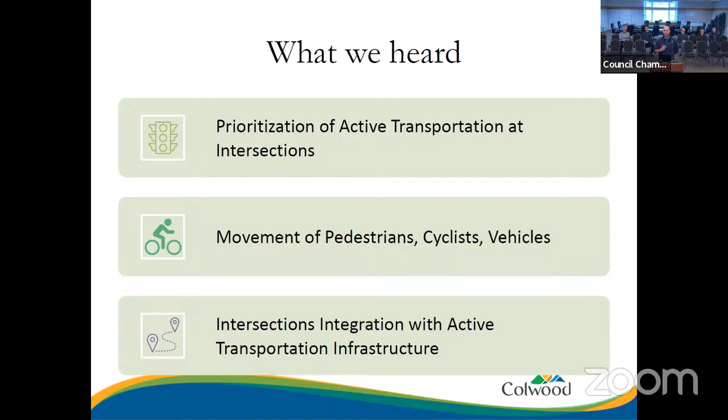Just to refresh on what we went over in the last meeting and what staff heard: we discussed the prioritization of active transportation treatments at intersections and the desire to review intersection design and explore different treatment options. What this means is reviewing how pedestrians, cyclists, and vehicles move through intersections to promote the use of active transportation, which means ensuring the integration of intersections with our active transportation infrastructure.

So these are the general guidelines for active transportation projects. Taking a step back, what guides our decision making for infrastructure: we have our OCP, which provides the community's input on the objectives and direction for the city. We have our TMP and ATNP, which outline the transportation network and design of the road network down to the facility types based on volumes, speed, and road classification. And we have the BC Active Transportation Design Guide, where you'll find the majority of guidance on our active transportation infrastructure and facility types, which came out in 2019.

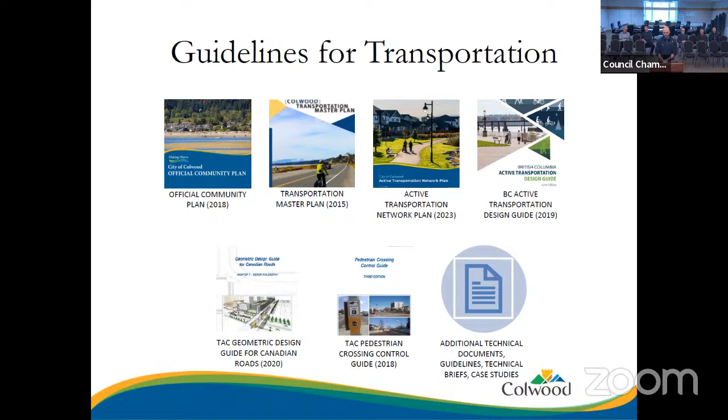Going down to the engineering standards, we have our Transportation Association of Canada geometric design guides for Canadian roads, and our pedestrian and crossing control guides. These provide the engineering requirements based on speed, volumes, and other design criteria. And of course, not to mention other technical documents, things like NACTO design guidelines, and other briefs and case studies.

I'll move on to the next slide here. Moving on to the active transportation treatments, here you can see the general change in active transportation treatments. Starting with the first one, a crosswalk with twin parallel line markings - this is the first level of upgrades you see at an uncontrolled crossing. Twin parallel lines provide that space for pedestrians to cross the road and provide delineation. Moving up, in areas with higher pedestrian volumes, or school zones or playground zones, you'll see things like zebra lines with advanced yield-to-pedestrian markings.

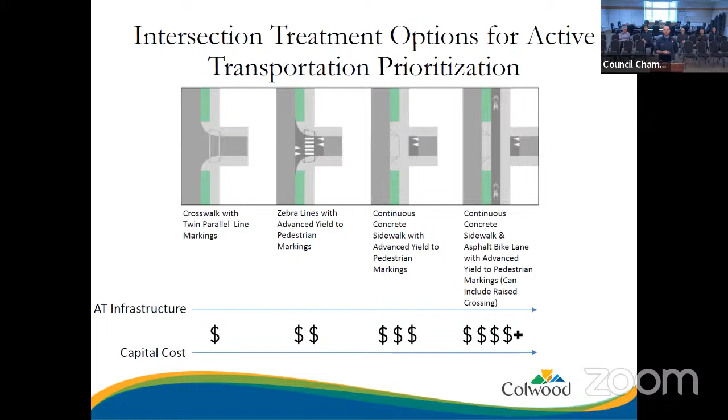We then get further into higher levels of active transportation treatments at intersections, such as continuous concrete sidewalks and continuous bike lanes. As you can see, an increase in active transportation infrastructure comes with an increase in capital cost, ranging from say $5,000 for thermoplastic all the way up to $50,000 for a crossing, as you get further into the active transportation infrastructure.

So as I already discussed, that first level is the twin parallel lines and zebra crosswalks, and then advanced yield to pedestrians, which is of course accompanied by yield-to-pedestrians signage.

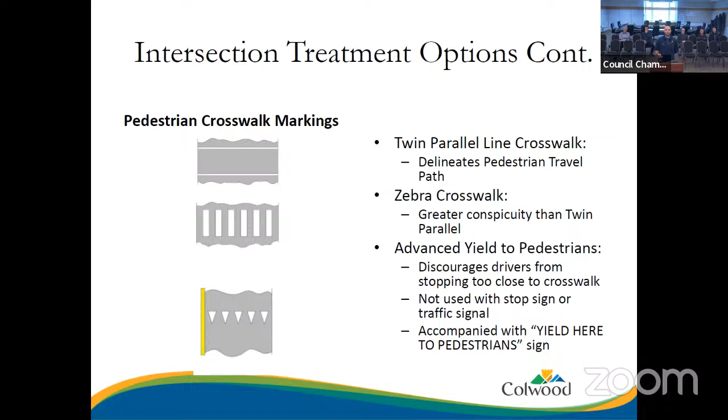This is a real life picture of what you can see for these types of crossings. So as you can see, there's the actual bike lane, which runs through the crossing, tactile warning strips for people with sight loss, providing intersection awareness here. Side street ramps up to the crossing and sidewalk. So this one in particular is a raised crossing.

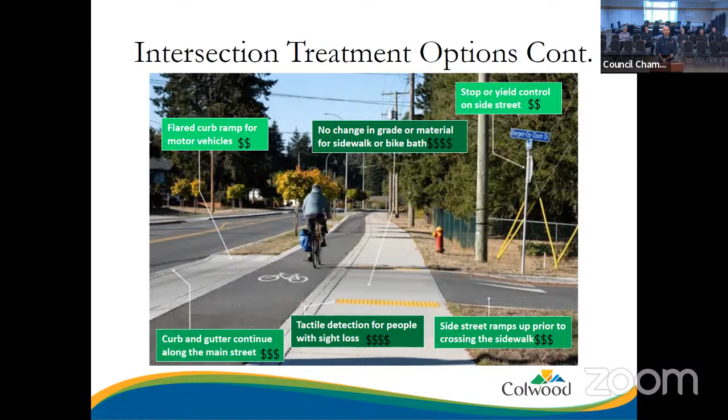And yield control. The different colors of green just show the difference in costs as you get further into the improvements.

So this is another type of treatment from our active transportation network plan, focusing on active transportation at intersections. This is where you can see in areas of high pedestrian usage, high vehicle volume, high speeds, and arterial roads. There's definitely a lot of treatments you can incorporate into active transportation design.

So you have things like number one, the no stopping, no standing zone. That's to allow for visibility of pedestrians and cyclists. Motor vehicle parking and stopping can't happen in front of this zone.

Bike yield line, that's again that warning, they call it dragon's teeth. That's used as a buffer between the crosswalk and cyclists stopping there.

Pedestrian islands allow pedestrians to get across the bike lane safely and have a place of refuge to wait, and also have a clear line of sight to the vehicles that are also waiting.

Bike queue area, similar concept, providing that visibility and a refuge area for cyclists trying to make that movement.

Number 5 is the bikeway setback, and that's just from the roadway. Number 6 is the corner island. 7 is the motorist waiting zone, for someone trying to make that right-hand turn. They're allowed to get over and have an area in case there's a pedestrian crossing or cyclist.

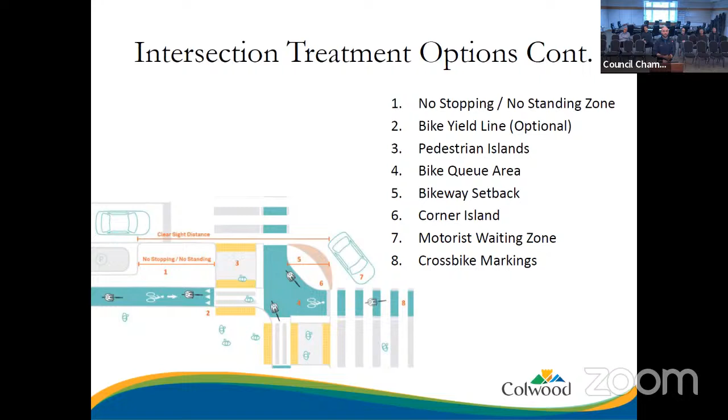And the cross bike markings, often delineated by different colors, such as green thermoplastic paint, and that's often a solid line rather than just a zebra.

So that was the first part, talking about the types of treatments and active transportation infrastructure at intersections and the different levels. Now we're here to talk about the sidewalk and bike lane projects. I mentioned those are starting hopefully next month, pending no speed bumps. We're going to go into the specific intersections and each crossing as part of these sidewalk improvements, what the upgrade has been at the crossings, and the general design philosophy of balancing the active transportation upgrade at the crossing with costs.

So you are seeing active transportation improvements here. It's not an unmarked crossing anymore. You do have the zebra paint implemented, a narrower crossing to allow for movement of pedestrians. And if I can go into the next picture, yes, that's what we have here today.

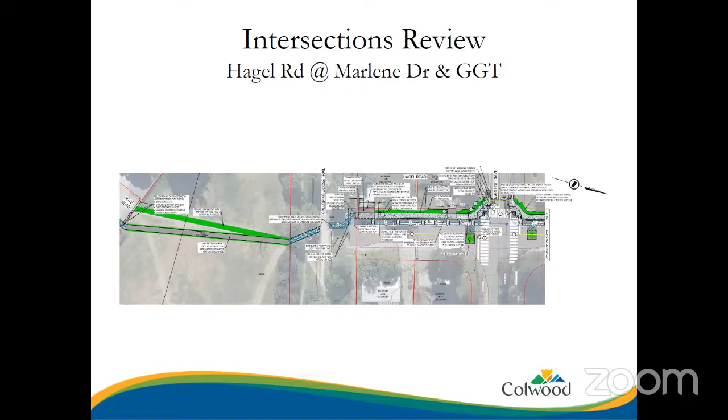Go ahead, keep going, David. Yeah, so just with regards to the one you've got up, Tyler, I understand that the Galloping Goose right of way is why that's still gravel and not sealed. Okay, fair enough. Love to see that the path through the green space is getting sealed, that's excellent.

I just wondered why there's two almost 90-degree bends in the sidewalk there. Could that be smoothed out to be a nice even curve, where it comes off Hagel on the right-hand side towards the goose? Yeah, that's a great point, it's finding that transition between the sidewalk and the trail, but definitely something we will be looking at. Is it overemphasized in the diagram perhaps? Sometimes it is, given that you're so far away - if you're on site it might be less of an aggressive 90-degree transition, but we absolutely like to have the easiest transition possible.

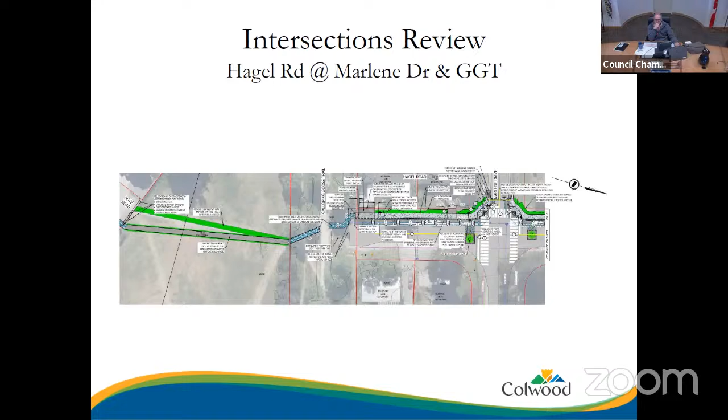One more question - this may be where Colwood's right of way and the CRD right of way meet, that chain link fence. Wonder if that could be widened. That's on the other side of the Goose, I guess on the west or south side. It might be in that photo, the next slide or back up one. On the far side of that left photo, you can see there's two posts and that's a chain link fence. I wondered if that could be extended at all.

That's going to be where the asphalt goes - it's going to be a 2 meter wide path from the drawing. So the concern is about the gap between the two fence posts, or how close it is to the fence? Just the gap between the two fence posts. That's all, more room's always better. I've got lots of room to make notes, so thank you.

So that's me for that. Is that it for that intersection stretch? Anybody else for the Hagel stretch? Colin, Stefan, good.

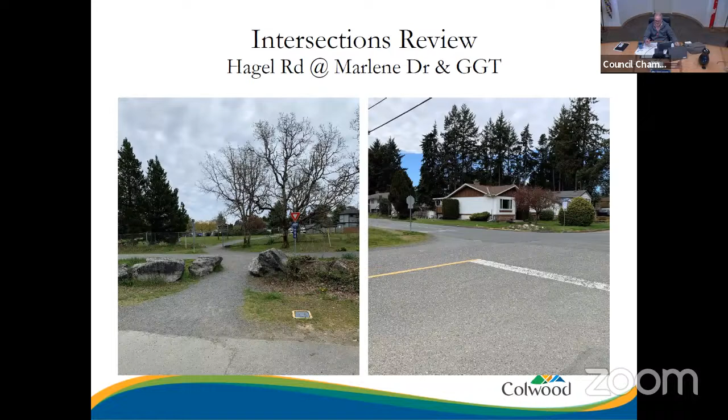And I'm good, thanks. Can't read my writing. Okay, I think that's the first slide.

Yep, okay. So Kelly Road, this is the second of our active transportation projects identified as the last of our first phase of active transportation sidewalk and bike lane projects.

As you can see, it's not on here, but the playground zone is just in the top left corner. So this is an area contemplated with high pedestrian usage with the playground zone. We also have the Colwood Bikeway on Hagel Road, the top part coming down to Metchosin, which connects up to Metchosin at Sooke.

At this intersection we have the zebra crossing and the narrowed concrete let-downs. There are perpendicular lines to the zebra crossing that delineate the direction of travel. That's intended for people with visual impairments - when going down the ramp they can feel the tick of the lines, allowing them to direct their direction of travel.

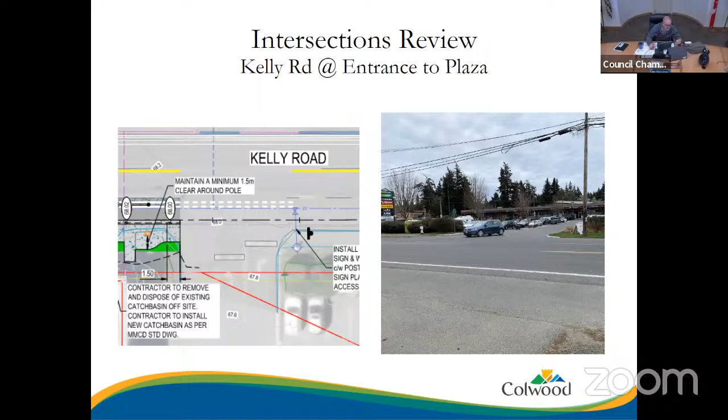Yes, please. Thank you, Chair. There you go, thanks Tyler. Sorry, do you mind if we bring it back to the David Cameron entrance?

Thank you. I just wondered if a continual treatment would be considered there, because it's a high vehicle and pedestrian volume coming in and out of the school. It might encourage drivers to slow down when entering and exiting David Cameron. I know it's a very short section of bike lane, but it looks to be a really wide boulevard with just an unprotected bike lane for the school kids coming out heading up Hagel. I wondered if consideration was going to be made to have a grade-separated path on the boulevard rather than having the kids come around with just a line of paint on the road.

So are we talking on the road to the school or out on Hagel Road around the corner? On number 7, let's look at that crossing - in the drawing it's going to have a curb cut with pedestrians coming down to street level. I wondered if it had been considered to have that as a continuous raised concrete treatment, so the sidewalk stays at sidewalk height and vehicles have to proceed up to that level with Dragon's Teeth up onto that table and back down again. So it'll slow all turning movements as well as encourage drivers to stop before the crossing, especially at a school entrance.

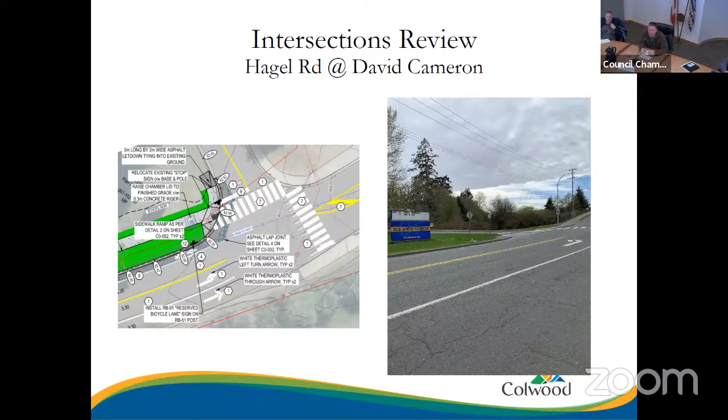I just would like to comment on the Kelly on the corner of Herm Williams Park. The existing pedestrian crossing is really dark, there's no lighting above it. It's actually quite far away from the nearest light, really dark at night. I wondered if any lighting improvements were part of the plan there above the crossing, or flashing amber lights, or what have you?

It does have flashing amber lights right now, but as far as street light goes, there's one facing into the park quite a ways down, and the other one leaning right over into the middle of the park, and on the other end it's quite a way up Kelly Road. So is any lighting part of this? Is this a sidewalk contract?

Yes, but lighting, I'm remembering back to before I started, I believe in council meetings lighting was something discussed and reviewed. It was not decided to implement lighting on these projects given the costs. However, as part of these projects we are installing conduit for electrical, so if in the future council decides to provide lighting, the minor infrastructure would already be there.

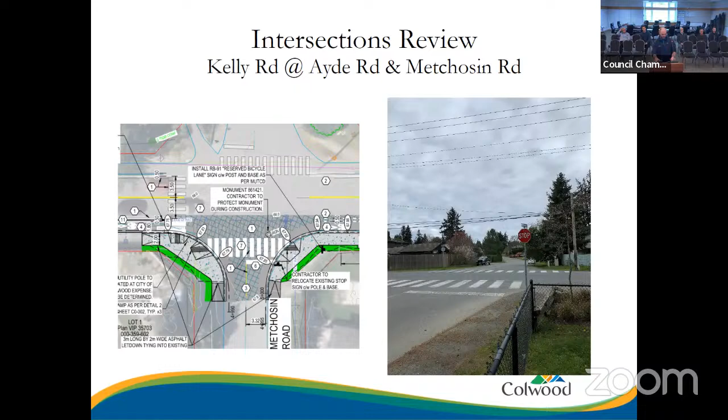I guess it's still my turn. Okay, so Lagoon Road - this project runs from Milburn Drive to Aloha.

Starting at Milburn Drive, there's a pretty tight corridor here to fit active transportation infrastructure. You see the dotted line, and right where that picture ends it turns into a solid line with bollards getting around the corner. We'd love to have the buffer there, but we couldn't fit it in with the room we have. That's balancing costs - you can see there's a retaining wall along Lagoon Road there, and that's implemented just to realize the infrastructure that we can.

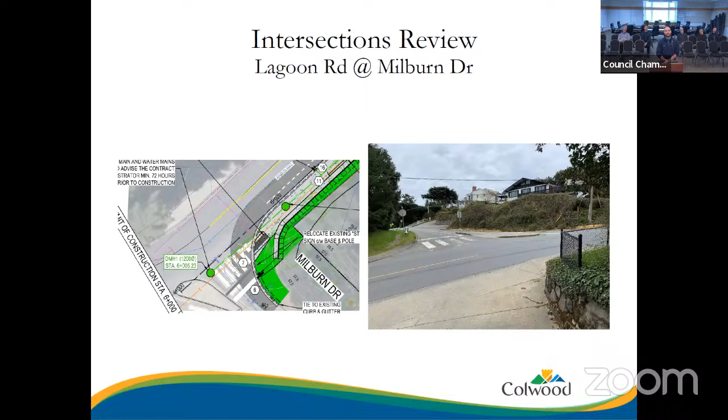And yeah, this has the zebra crossing as well, at Heatherbell. This is another spot where you have the zebra crossing getting across the road to the existing sidewalks going up Lagoon. This road was identified for traffic calming, which we know has the speed cushions.

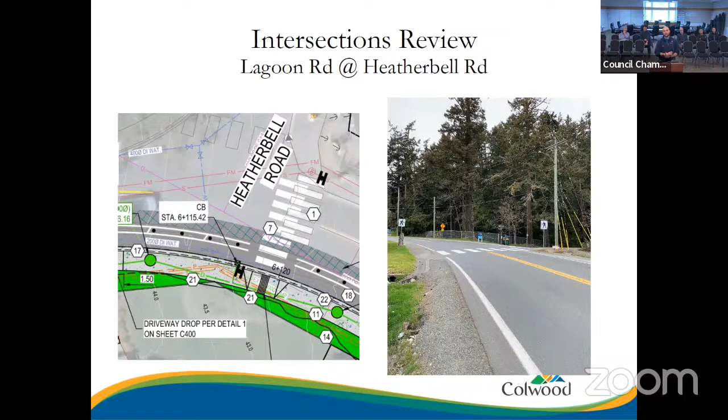So this is one area where you could see a raised crossing, but you have to think about the proximity to the existing crossing or the existing speed cushions. As you can see in the picture, you have the bollards there, continuing from the previous section, helping get around the corner for cyclists, delineating between the bike lane and the driving lane. Those end shortly after that picture.

This is Crowhurst Place, the first cul-de-sac crossing. We are seeing an improved crossing here - likely just a twin parallel, but keeping it consistent as well as trying to encourage active transportation. We've had the improved zebra crossing and the bump outs as well.

We'll go on to Joanne, similar treatment. What do the green crosshatch markings represent? Is that just the width of the treatment, or? Oh, that's the landscaping restoration. Gotcha, yeah.

Sorry, I meant the crossed green lines in the middle of the road. Oh, I think they're blue on this screen. That's the asphalt restoration. Okay, so that's the actual area of work. Is that the idea? Okay, that's where we'll be tearing out asphalt and installing new asphalt.

And you mentioned bollards - actual bollards or pickets? Pickets. Thank you for the clarification. Yeah, I was going to say a bollard in that corner, a bus is going to take that out in a heartbeat, because that's already tight on that corner for the 52 there.

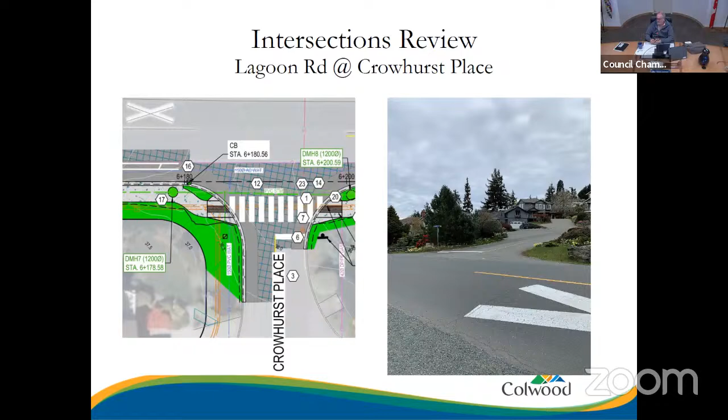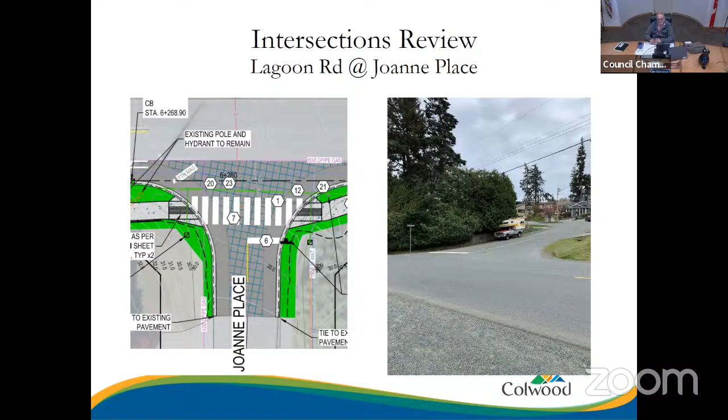All those works are on one side of the road, right? There's no sidewalk going on the other side. Yes, yeah, as part of this program. I think we considered that, but it's problematic because there's a ravine there and stuff.

Thanks, Tyler. My only thought was, because the lagoon's such a slope, what's the angle of the gradient of the sidewalk, say for people traveling down on a wheelchair or a walker or whatever? Is that in consideration? Do you know what the maximum slope is on the sidewalk at all?

The gradient of the sidewalk will follow the road going up and down, and unfortunately there's not much you can do about that. Going sideways, it's 2%. Oh right, yeah, righto, 2%. Yeah, that's awesome, that's good. Thank you.

Cool, just a quick question. The Lagoon Road project, just for my knowledge, how is it going to proceed? Are these one after the other, each intersection, or are you starting at one end and tackling them all at once? I'm just curious for when I can expect to see this effect on the traffic, and when it'll be started and finished.

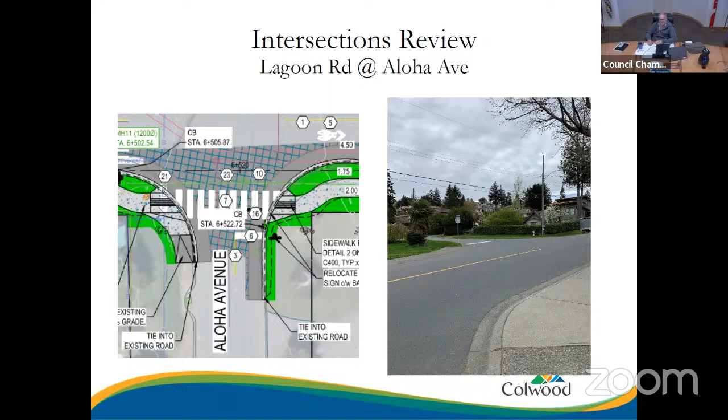That's correct, yeah, you'll see the entire road ripped up, and I'm no engineer, so... Do you have anything else, or? Oh, Lagoon, thank you, apologies. That's it for my presentation. Yeah, why don't we start with Paul, and there, David?

Oh hello, I am pleased to see the zebra crosswalk. I know sometimes they put a zebra crosswalk in but later rip it up to just put 2 parallel lines in areas, especially in areas with high concentration of pedestrians, like near the Royal Bay High School. That was unfortunate because some students expressed to me that now there's less visibility for them, and cars aren't paying as much attention because it looks more like a road than a place where people actually cross.

So I am happy to see that many of the intersections are including that. I noticed, I think one of the intersections along Kelly, near the parking lot, had no zebra crosswalk there. So it's a bit curious to know why, with so much vehicles coming in and out of the parking lot, that wasn't considered needed enough to have a zebra crosswalk there. And I was wondering, because I know there's quite a bit of cost to why you can't have continuous crosswalks in many areas.

So just wondering why maybe not green paint or other things to also show the bike lane, to put the most amount of stuff there to show people this is a place for people rather than cars, when you can't put in the continuous crosswalk to give that safety. But instead of just paint, which is not ideal when cost is a huge consideration, try not to skip out on that last step to make it a bit better in some of those areas. If there are funds available, do continuous crosswalks in areas of high pedestrian and cyclist use, like areas with mass development or closer to schools - those would be priority areas. In areas that can't have them, continue with zebra crosswalks, and also have continuous bike lanes with green paint to give more color contrast from the road, showing this is a place where people are. Thank you.